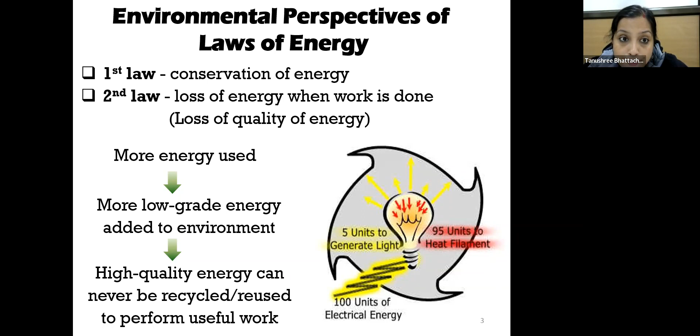So am I clear? Because these are the fundamentals of physics, and this is absolutely essential to understand if we want to get the idea why this energy conservation is needed and why this energy is being lost. So whatever energy is in demand, very little of that is being converted into useful energy, and most of it is lost as unused energy. That is what I want to emphasize by discussing the laws of thermodynamics.

Similarly, in natural systems also. I have given you the example of a man-made system. In natural systems, like in ecology, the ultimate source of energy is solar energy. So when that is trapped by a plant, if we consider that entrapment as 100%, that energy which is trapped by the plant is used up by the plants, so some energy is lost for the plant's respiration and other metabolic activities, and the rest of the energy is there in the plant.

But when a herbivore, as you can see here, is eating up the plant, only 10% of the plant's energy is being converted to the herbivore. So if the plant is fixing 1000 joules, only a fraction is converted to the herbivores. And if we go to the carnivores, then again 90% is lost, and only 10% is available as food energy from the herbivore to a carnivore.

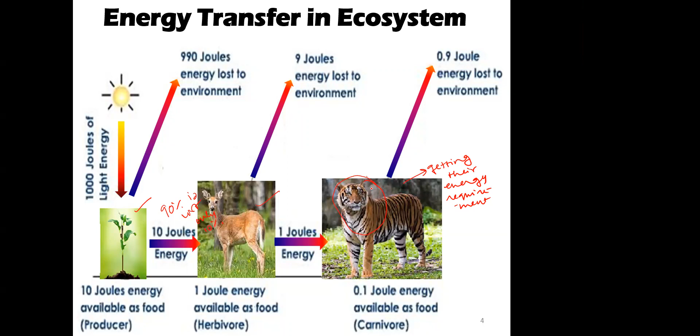Any? Yes. Could be water or the atmosphere, direct respiration process. Not exactly. Respiration is the process to convert the energy into heat energy or useful energy. But in this case, the carnivore is not taking its food from only one source, it is consuming from various sources. And that is why it is meeting its energy requirement.

Okay. So the basic concept is when you need useful energy to be utilized, you have to consume more and more, because the carnivores don't eat only one type of food. They eat from a variety of sources, and they consume more. The more they consume, the more they maintain their energy.

Similarly, the exact concept is in our society. We are living in a very energy intensive society, where our energy demand is very high. We require more and more energy because we use many electrical appliances in our daily lives. We need central heating, so we need more and more energy in the form of electricity consumption. Then the loss of energy will also be very high. So this is exactly what is happening in nature, and this will exactly happen in our daily lives.

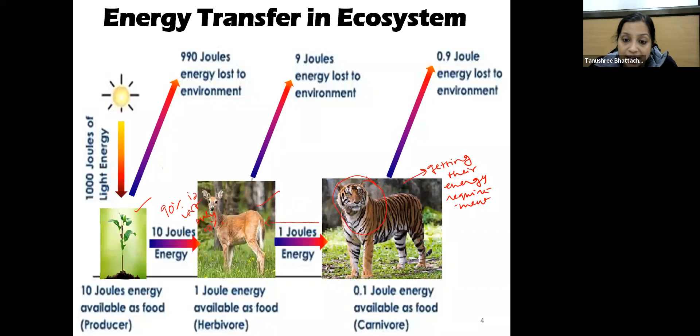But in the case of matter, it is a different situation. When we talk about material resources, mineral resources, they do not disappear. Once on the Earth's surface, they can be recycled. Unlike energy, matter is not lost when it is converted from high quality matter into low quality matter. It can be dispersed, it can be transformed into low quality matter, but it will not disappear. It will remain on the Earth's surface.

Similarly, for example, the high quality matters are your pure metals, pure fuel, pure drinking water, whereas the low quality matter is ore, which is impure, because you have to convert the ore into pure metal. So low quality to high quality conversion again needs lots of energy input, lots of technological inputs.

And when we are polluting, then you are actually contaminating or making a high quality pure water into a low quality water. So these pollutants are low quality matter: impure water, which can have huge health effects, and impure fuel, which can give out many greenhouse gases during combustion. So these are the cases where low quality matter is not actually needed, or it is not preferable.

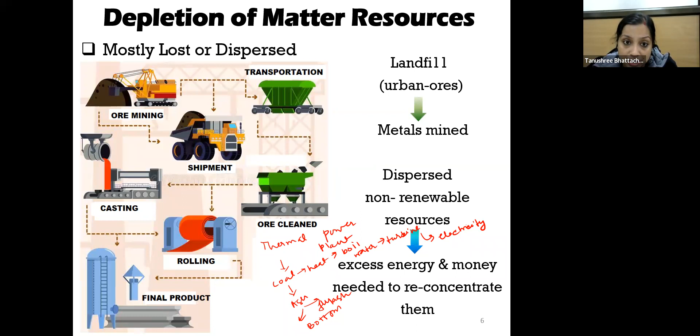What if the fly ash is not even produced? If we come with a technology, the thrust should be that this dispersion of matter is minimized, and the transformation from high quality to low quality is minimized. How? I will explain with lots of examples.

Now, the depletion of energy resources. We were talking about matter, the basic concepts of matter and basic concepts of energy, how they are lost, how they can be dispersed, how they can be recaptured. But now, let us talk about the conservation measures and other sustainability measures to reduce the depletion of energy resources.

So one, once energy is transformed, it is lost forever. By now we have understood that. Waste heat can never be reconcentrated. Like matter, if you have to reconcentrate dispersed matter, there are ways which are energy intensive, technology intensive, but for waste heat, once it is lost, we can never reconcentrate that. So the only way is to use a major source of renewable energy.

If we are using renewable energy, I think you all know what is renewable and non-renewable energy. Renewable energy can be regenerated in a lifetime or in a stipulated time period, because fossil fuels, which are non-renewable, take millions of years to develop, but when we are burning them, within a few years we are exhausting the resources, and then you need another million years to generate that resource, which is a huge time frame, and it becomes non-renewable.

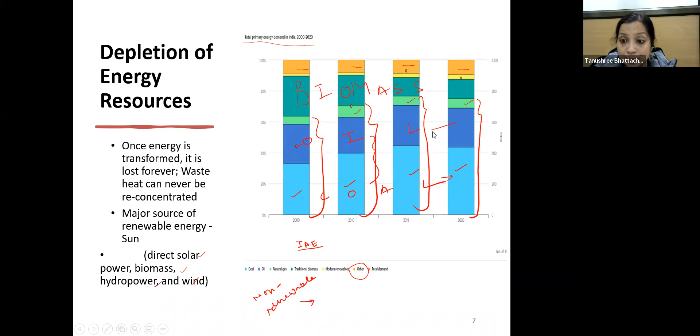Anyways, as we use more and more fossil fuel, it will deplete. So the only option is to use renewable sources to reduce this depletion, because renewable sources are never going to deplete. Now for resources, this is the concept of the bubble pattern. As we have seen in the previous slide, in India in the last 20 years the demand is still increasing, and the demand for fossil fuel is increasing.

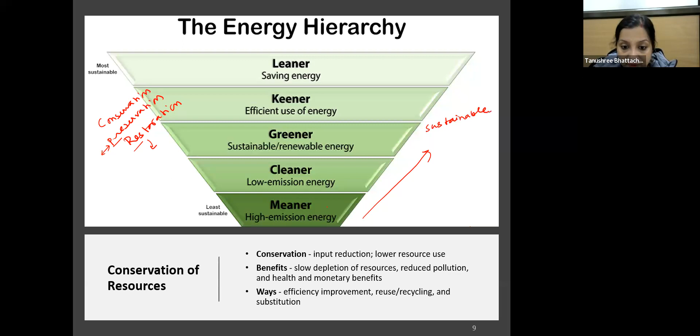Now, how to do this? First, energy consumption per capita should be reduced. For material also, use of efficient material, the technology which helps to efficiently use the material should be used. Like Japan converts 70% of the raw timber into finished wood products, while USA converts only 50% of the raw wood into converted product. So of course the material use efficiency is more in Japan, and this also implies that high grade to low grade conversion is less.

This also implies that dispersion of timber is less because we are getting more finished products. So that is material efficiency. And energy intensity index is if we consume less, the energy used per capita is less, then the energy used is less. So efficiency improvement is one of the major ways out to conserve the resources.

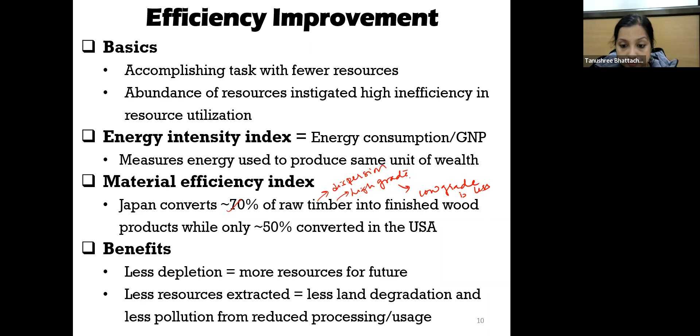Let us see one example. In our automobiles, in Indian mentality, first we ask what is the mileage. Why? Of course, that is pocket friendly if the mileage is more. But there is another aspect also. If the mileage is more, that means that you are consuming less of your non-renewable energy, and you are getting the same output. So this is less energy intensive. So in a way, you are efficiently using the energy.

And vehicle standards, engine efficiency, lightweight vehicles, these are actually creating the energy efficiency. So preferring a vehicle which uses the energy efficiently is not only pocket friendly, it is also energy efficient.

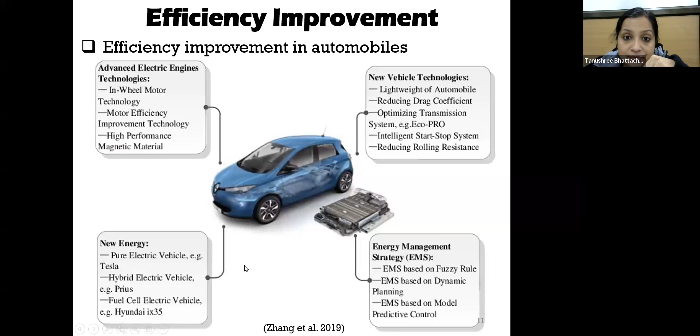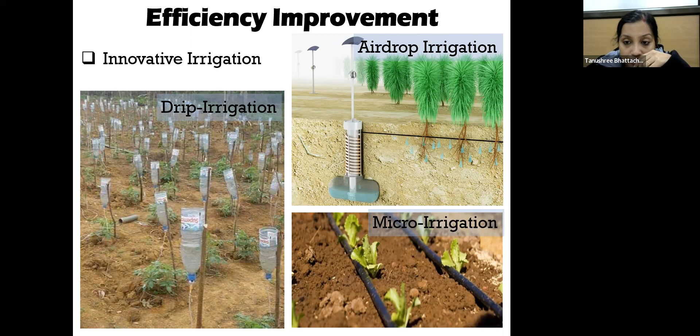Okay. And for example, in materials, sustainable use of water is an efficiency improvement. Drip irrigation: if you're doing the irrigation with a pump, it uses gallons of water. But if irrigation is done with a drip, then it is less water intensive. Similarly, now there is an airdrop irrigation system also, which captures the humidity from the air and condenses it into water, and then it is supplied at the root level of the plant. And there can be micro irrigation where in the supply pipes there are small holes, and it can sprinkle the water, and less water is being sprinkled, so less and less water is being used.

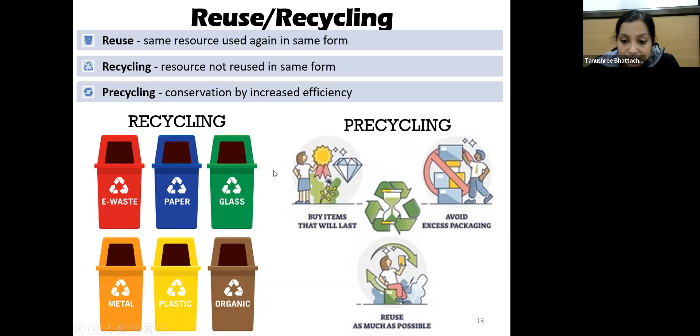And then of course the concept of reuse and recycling. The same resource can be used again in the same form, that is reuse. And we know that in our house many items come which can be reused, like bottles, like cans, like the packaging bottle of a particular thing. And recycling is when the resource is not reused in the same form. It is converted into a different kind of product, or the waste can become a raw material of other product formation. Okay. And there is pre-cycling also, which is conservation by increased efficiency. If we use efficiency, then there will be conservation, the energy itself will be conserved. How? I will show you the examples.

And we know in case of solid waste, like for example glass bottles, they are consumed, they are collected, and they can be recycled. They can be reused also, the glass bottles. So in turn, you're not throwing it away after one use. So this will be a good option to recycle.

For example, aluminum cans. Aluminum cans can be recycled in a much more efficient way, because the extraction of aluminum ore and converting it into finished product requires a huge amount of energy. But recycling of aluminum can save up to 90% of the energy cost as compared to virgin aluminum. And it can also reduce the air pollution by almost 60 to 70% as compared to virgin aluminum production. So it's not only the recycling of material, it is also the reduction of pollution in question.

Okay, and the recycling loop is only closed when the same discarded product is turned into the same new product without loss of its property, and it is again repurchased. So only then will this loop be closed. If the recycled products are repurchased, then only is it a successful recycling.

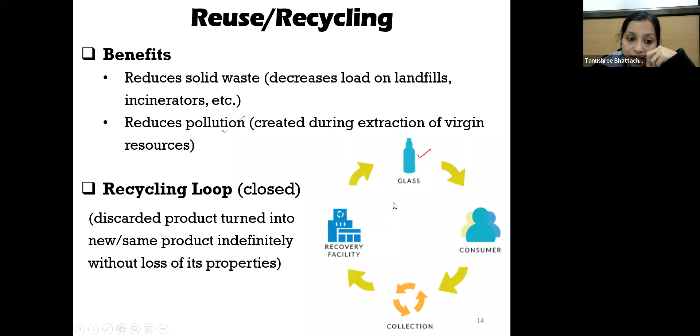And another way is substitution. So one resource is used instead of another. For example, aluminium, which I said is very easy to recycle, can be used as a substitute for copper wires in electric appliances. Paper can be used as a substitute for plastic, because plastic is a byproduct of fossil fuel.

Okay. So if it's a byproduct of fossil fuel, then of course it is coming from a non-renewable resource. But paper is made from pulp, and it can be recycled very efficiently also. So it is coming from a renewable resource.

And we know nowadays we all prefer paper cups for drinking tea, or we prefer a kulhad. If we are given the option कि plastic cup में पियेंगे या paper या kulhad में पियेंगे, we always prefer them for health issues also. And not only that, if this kind of awareness is there, these are recyclable materials, so they can be recycled.

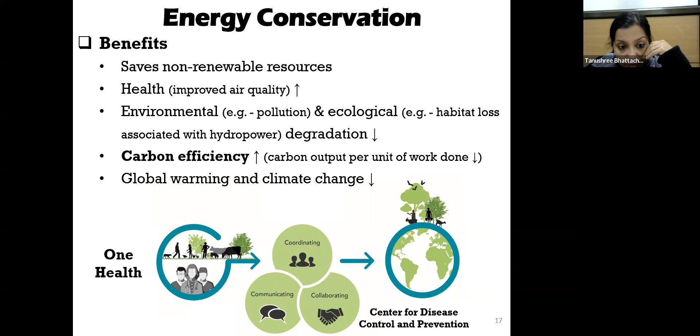And in foreign countries, households can choose their electricity provider. There are many private companies also there. It's not government owned companies which supply the energy. There are many private retailers of energy. So you can choose from which one to purchase, and that will begin or initiate a competition, and that will trigger the energy sellers to distribute the energy in a more sustainable way, so that less and less energy is being lost.

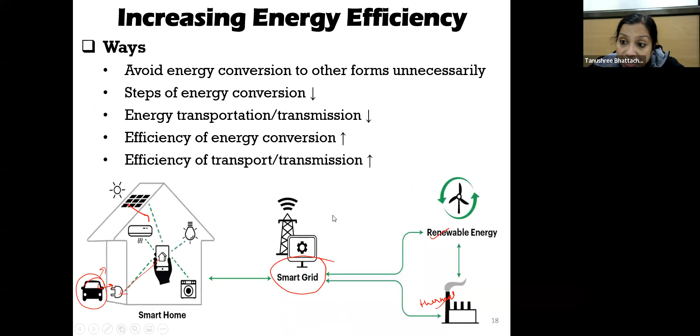In India, the energy lost in this grid system is very high, 30 to 40% is being lost. So that loss will be minimized if they have competition. And there can be some other options also, like fine tuning the old equipment, maintaining the old equipment, upgrading the old equipment, which consumes more and more energy as it becomes old. Their energy efficiency drops. So upgrading them or fine tuning them, use of superconductors. Superconductors are conductors which have almost minimum resistance or no resistance. So they are very efficient energy providers.

Then cogeneration. As I was saying, there is a waste of heat in the thermal power plant, when in the boiler we are boiling the water to produce steam to run the turbine. So there is a lot of loss of heat from the coal thermal power plant. So if this heat loss from the boiler can be recaptured, then the heat can be used again to heat the water. And such kind of technology is now available.

Now the water is not boiled in a boiler in most of the thermal power plants. It is passed through tubes. Those tubes are kept in insulated coal heated jackets, where under a pressurized system the steam generation is more and the heat loss is minimum. So such kind of technological innovations are there, and research is still going on.

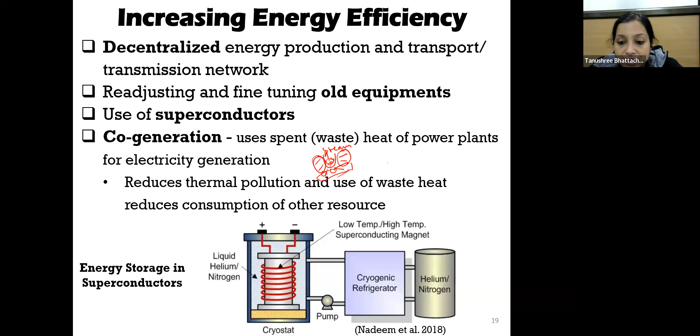In our residential sector, of course, green buildings are examples of energy efficiency. More and more sunlight can be used in daytime in offices, in commercial areas, in residential areas. In most of the offices, we switch on the lights throughout the day. But if the design is smart enough, like in a green building, more and more sunlight is coming; the facing of the building is such, and the glass panels are in such direction that with season, as the sun orientation changes, the glass windows face those directions, so you can get more and more solar energy. So you can use less and less lights during the daytime. This is one of the examples.

There are many more ways, like wall insulation will give you a cooling effect in the summer months, so less and less use of air conditioners will save energy. In winter months, the cold air will not penetrate if there are insulation cavity walls in your house, so it will keep your building warm.

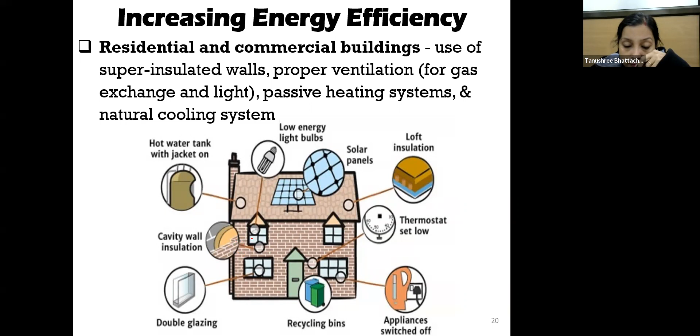And as I have given you the example of the LED bulb also, for energy efficiency, if you want to buy a five-star equipment, maybe the initial investment is more, but in the long run, your energy is saved and your cost of energy is minimized. Of course, these are the basic ways we all know. Instead of individual vehicles, more and more public transport will save energy, as well as material resources. Then the bicycle culture in campuses, in residential areas, or for nearby areas where you can commute to your office by bicycle.

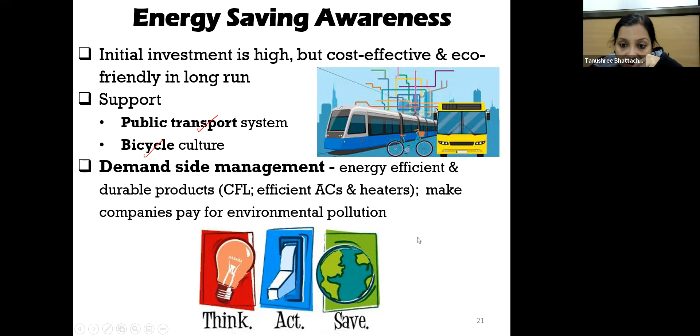Then this bicycle culture is being promoted. It is now being promoted in India also. All the smart cities are having bicycle parking areas, as well as bicycle vendors, where you can pay and hire the bicycle on a 1 hour basis. That is also there. So these are the awareness and the options.

Now the role of government, the motivation from the government, implementation of government is very much important. Government must promote the locally available renewable energy. For example, in rural areas, biomass is amply available, so biomass based energy production should be promoted, should be subsidized, and dependence on non-renewable energy should be decreased, which is in the case of India.

60 to 70% of our electricity comes from fossil fuel based thermal power plants. So that dependency should reduce, and more renewable energy sources should be explored and promoted. There should be tax benefits, there should be rebates, and subsidies. And energy efficient technology should be promoted. Fuel efficiency standards for vehicles are becoming more stringent, and energy efficiency standards for buildings are becoming more stringent nowadays. So that is the government's role.

And not only that, government should motivate research and development also to improve the efficiency of energy and other ways of recycling and reuse. Tax rebates should be given to those who are using recycled and reused products, and for materials also there should be different tax for different products.

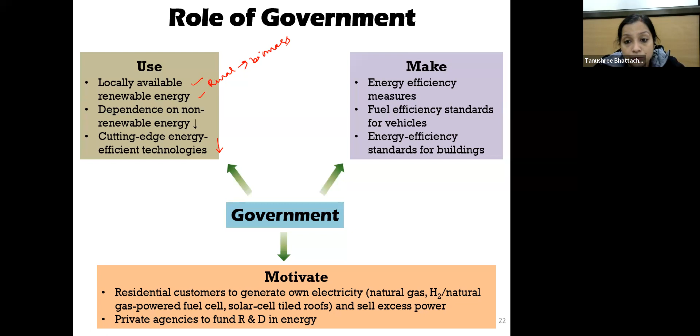And lots of R&D funding is now being given by the government for waste to wealth generation, this concept of how the waste product can be made into useful products. And as I said, energy efficient products should be promoted. There is a concept of not megawatt, but negawatt, which negates the energy consumption, like CFL fluorescent bulbs. And as I was saying, retail wheeling is giving options of independent power producers from where you want to purchase your electricity.

There should be tax exemptions, and more tax for the products which are virgin, which are not using efficient appliances. And public transport should be more facilitated, more subsidized. For reducing energy demand and cutting customer bills, there will be a reward system, or a subsidy system for those who use less non-renewable energy.

And for resources also, the same thing. Exploring new deposits creates lots of problems in the ecosystem also, so that should not be promoted, because matter is not being lost, energy is being lost. So energy efficiency is the only way, or our conversion of dependency to renewable energy should be increased. But matter should be recycled very efficiently, and those efficient technologies should be promoted. Recycling should be promoted, like metal can be recycled.

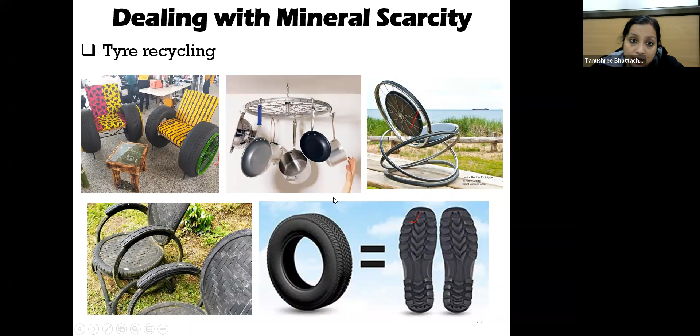Even the rubber part of utensils is being used. This is the wheel of the frame of the tire, which can be used as a hanging material. Furniture, and even now the soles of shoes are made of tires. So for material, these are the options.

Chemical-intensive polluting materials can be substituted by organic material. For example, organic fertilizers can be a very good substitute for chemical fertilizers. Then, of course, recycling. In case of matter or minerals, if our products are durable, reusable, and last long, then the throwaway mentality will decrease. Because if the products are durable, and in the long run, with minimum repairing or refurbishing, we can reuse that product, that will be more beneficial, and it will promote conservation of matter.

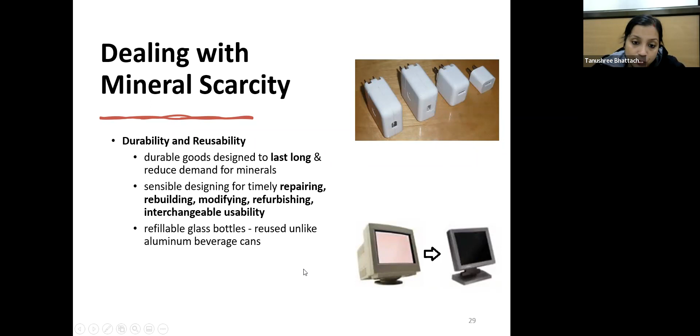As I was saying, minimization is one of the options. Chargers are becoming smaller nowadays, our computers are becoming sleek, our phones are becoming sleek, so less and less material is consumed. Even for hearing aids, previously we used to have very big hearing aids. Now we have very small ones. Even headphones, like the one I am using, are very small. Previously there were big headphones. So this kind of minimization will also help to conserve our material.

We have to understand that in the throwaway mentality, which is more prevalent in the West, the products are not very durable. Within a few years of use, they just throw away the products and buy new ones, which creates extra demand on society, extra demand for those materials, and more and more resources being used. So the throwaway mentality is to be cured. In the formation of a product there are many things involved. If we see the life cycle analysis of a product, right from ore mining to discarding and the landfill cost, the throwaway mentality costs a huge economic as well as resource depletion threat.

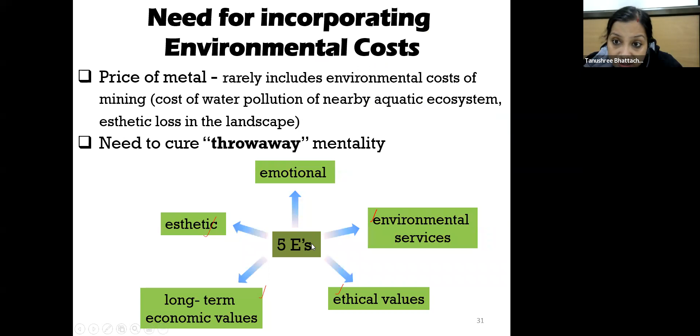So the ultimate thing is, we should move from a resource-intensive society, which is called a throughput society, to an earth wisdom society. The societal role is also important, because replacement of this throwaway mentality depends on us. So societal involvement is required, where 8 billion individuals contribute waste heat and pollution. The industrialized countries are very high waste societies; they are becoming unsustainable, so they are pushing for recycling, composting, disposal. In our country also, lots of emphasis is now being given to recycling and composting to reduce consumption.

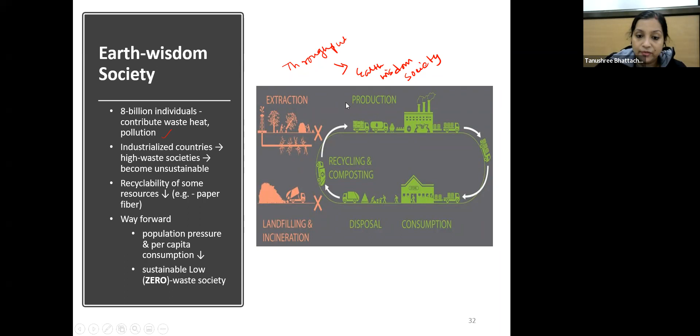Till now we are not that energy-intensive a society, but we should not become one. So we should think about an earth wisdom society, and the ultimate earth wisdom society is a zero or low waste society, where everything is reused, everything is recycled, and there is no waste at all, or biological waste is converted into compost and reused in the field. So the earth wisdom society, or low waste society, will only be successful when recycled products are reused, purchased, and economically and sustainably applied instead of landfilling and incineration, where there will be total recycling and reuse of materials.